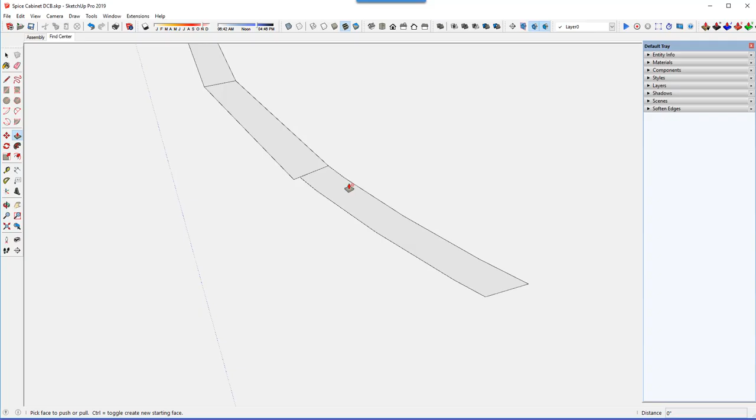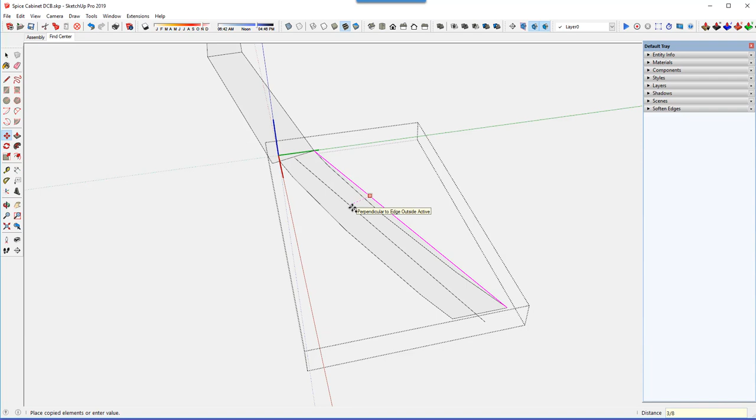In part one of this project, I showed how I go about taking these staves that have their arc shapes, turn them into the rough-sized rectangular lumber that's going to be used, the 3/8 thick material, by making these parallel lines here that surround the final shape.

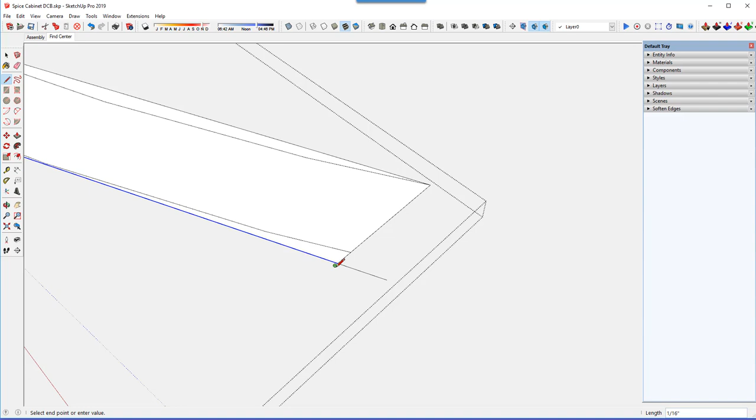And then I have the 3/8. Then I can take information from this drawing to the shop and create the final, glue up the rough stave and cut the proper angles and glue them up, and then final shaping.

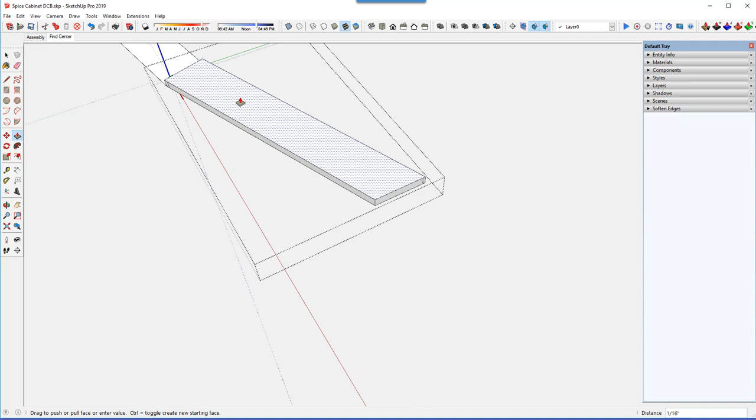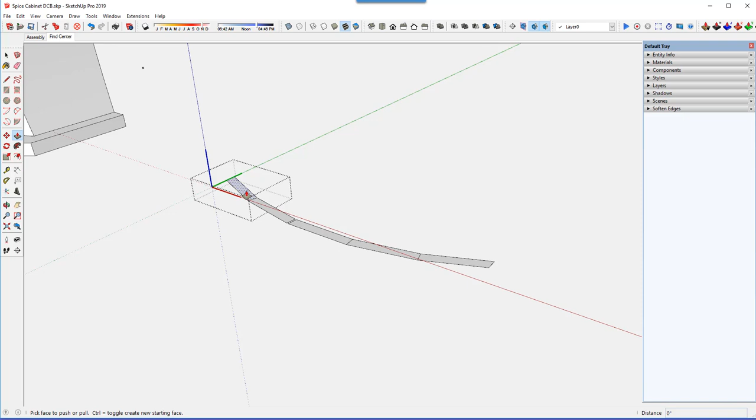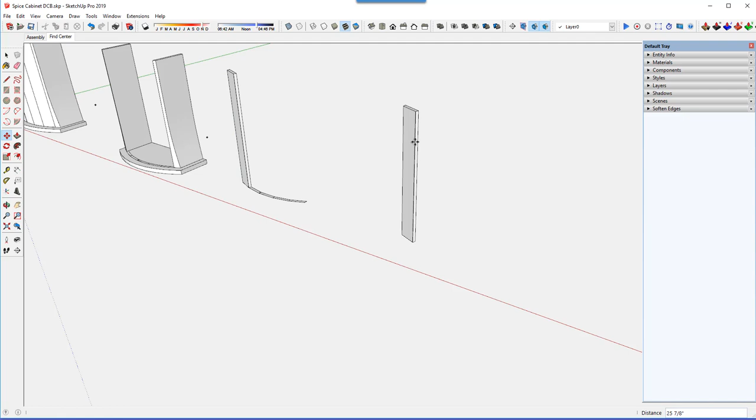So you can see the rectangular shape here, but I want to create the information needed in the shop at this stage. So let me just go back to this first stave, the left number 1, and pull it up to the height, its final height. And then I'm going to copy that component over to the right and do some more work on it to get it into a position where I can dimension and provide drawings for the shop.

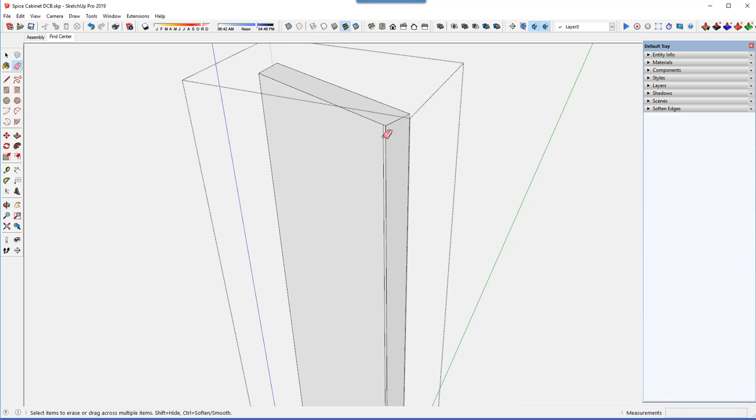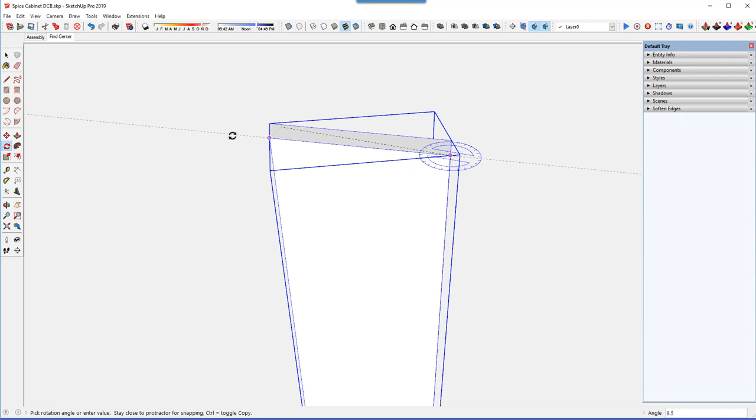So the first thing I see is an extra edge here, extra line that I can soften just with the eraser and the control key. But notice that the stave is not lined up with the axes in SketchUp, the red, blue, green. So the first thing I'm going to do is rotate this so that the face of it does line up with the red axis. So I've rotated it and I can see the indication that now it's on the red axis.

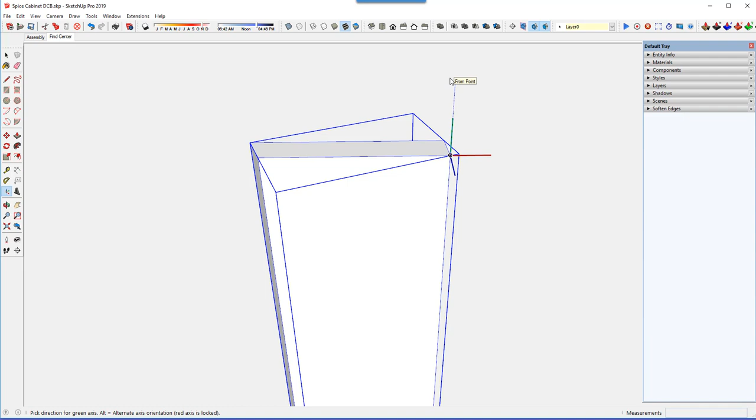And then I'm going to change the axes. Well, let me do that again. Right click, change axes. There are the axes that I want the component now to line up with the red and green of SketchUp. So there, now the boundary of the component lines up with the normal axes in SketchUp. That makes it a lot easier to dimension and create templates and so on.

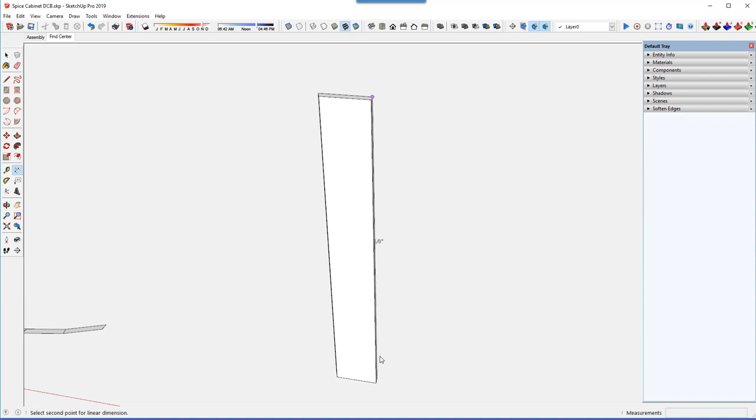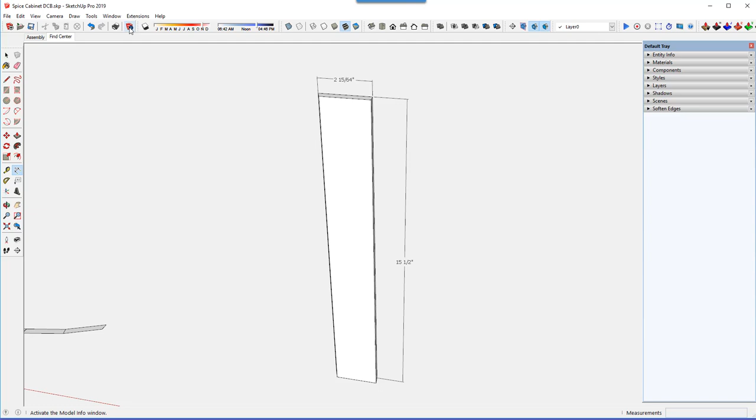So now I can dimension that component, its length, its full width. Oh, I'm showing 64ths, which I don't need that kind of precision here, so I'm going to change that in the units here to a 32nd. I usually work with a 32nd precision on these dimensions. So now it's a 2 1/4 wide stave, and it's 3/8 inch thick.

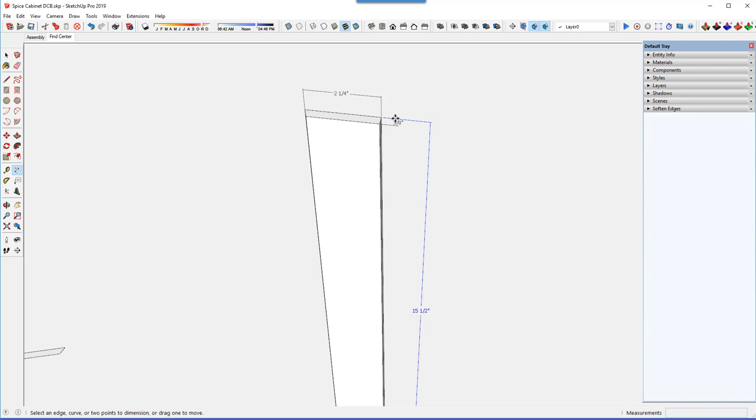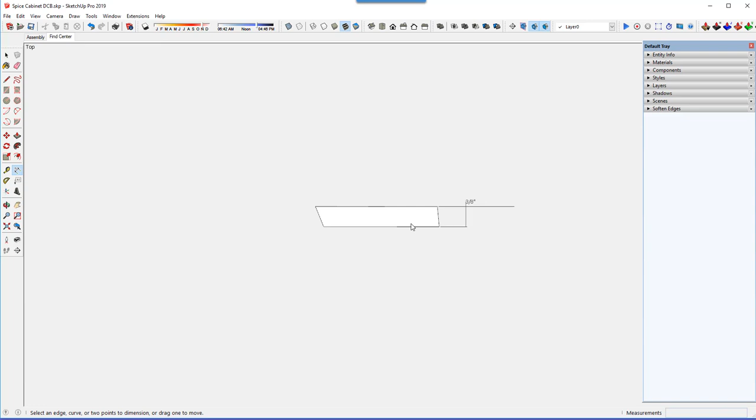So this is what I can now cut in the shop, but I need the angle information. So the best way to get that is to look at this in a parallel projection, top view. So in this top view, I can also show the dimensions. Actually, I should show the overall length of that as well, which is more than 2 1/4.

But first, I need to change some layers, add some layers, add a layer for the top view, and also add a layer for the perspective view, because then I can have these dimensions relate to those two views and not interfere with one another. So I can now also find the angle with the protractor. It's 112 degrees, so I can bring out a label that shows the angle there.

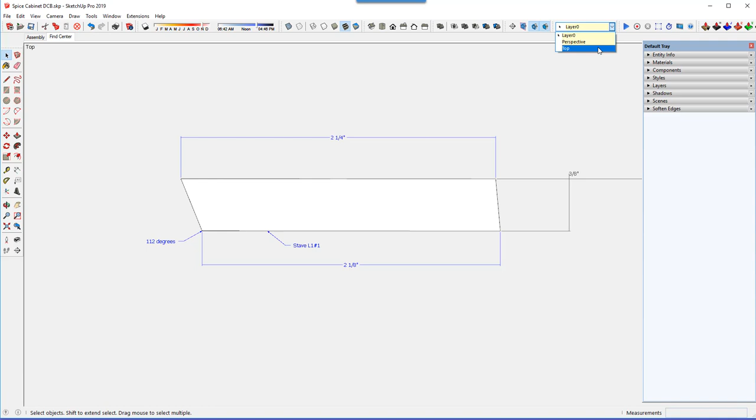Now, I want to relate these dimensions here and labels. Select them all, the ones I just added there in the top view, and then change it to the top layer, and then update the scene, or make the scene. This is the Stave L1, number 1, and it's the template.

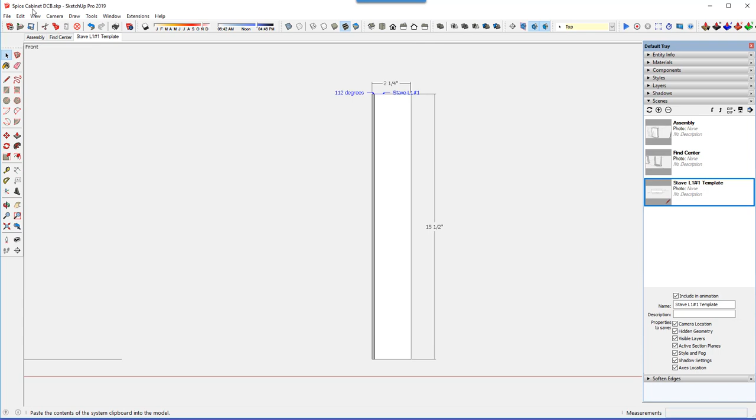And I can update that scene, and now those dimensions will show up in that scene only, not the perspective dimensions. If I go back to the perspective view, and I need to make the scene for the perspective view, and you can see that those,

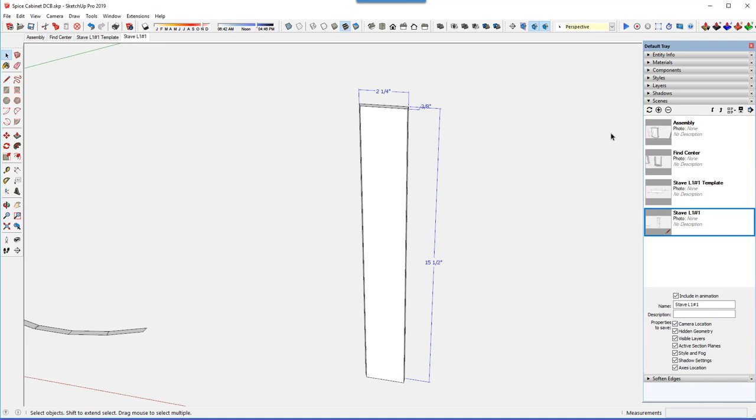so I'll make the perspective view here, Stave L1, number 1, and I need to set the layers, turn off the top layers, so now those dimensions go away, and only the perspective layers will show these perspective dimensions. And I'll make sure that those dimensions are also in the perspective layer so they don't show up in the top template view.

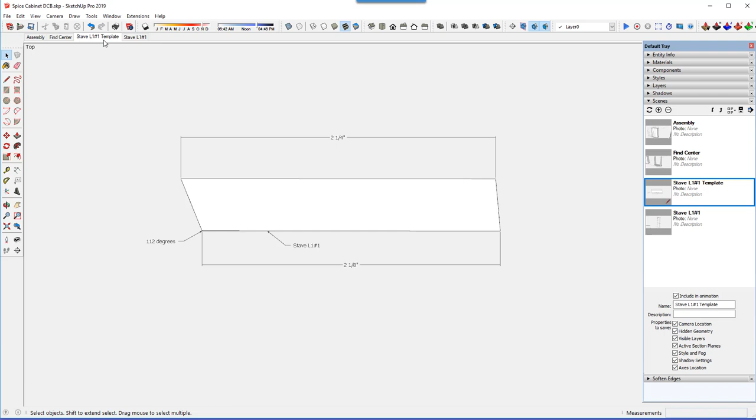So there's the top template view now, and I need to turn off the perspective layer and update that scene. Go back to the perspective scene, and now I've got the dimensions relating to those two scenes. So I'll quit here on showing a process for making the Coopered doors.